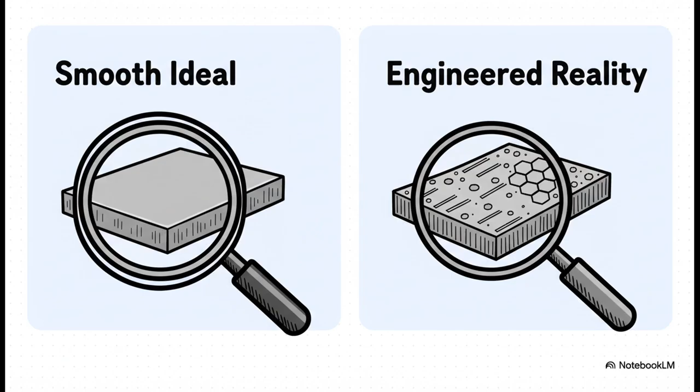So on the left, that's what we think we want, a surface that's totally flat, no features at all. But on the right, that's the reality of modern tribology, which is the science of friction. It's a whole world of microscopic grooves and dimples and intricate patterns, and every single one is designed for a specific job. The big takeaway here is that we've stopped chasing smoothness and started designing complexity.

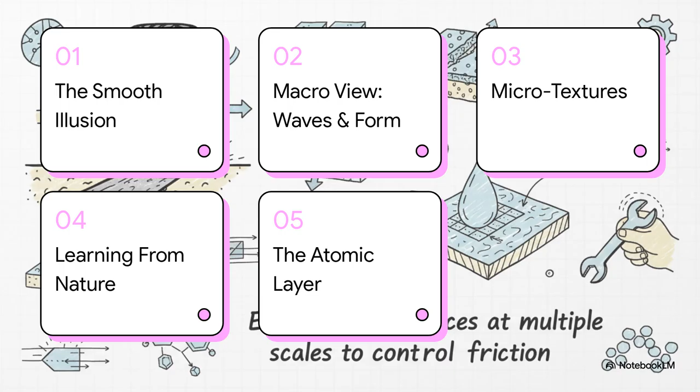So in this explainer, we're going to go on a journey from the world we can see all the way down to the atomic scale. We're going to shatter that smooth illusion, then look at the large-scale form of things, dive into those crazy microtextures, see how nature is inspiring these designs, and then we'll finish up with the atomic layers to give the ultimate protection. Okay, so let's start with that big idea.

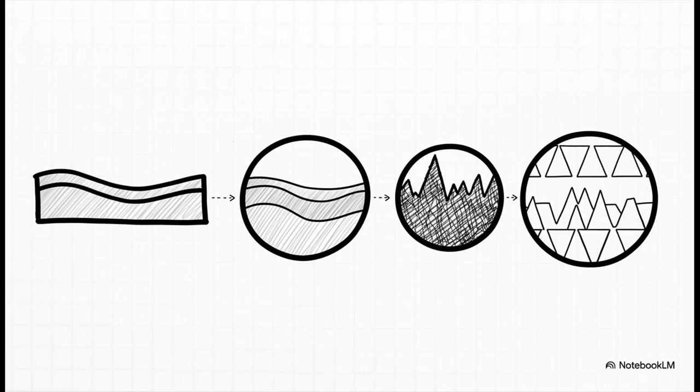For centuries, literally centuries, the main goal in any machine with moving parts, from a car engine to an artificial hip, was to reduce friction and wear. And for the longest time, the obvious answer seemed to be just make everything smoother. But here's the thing. It turns out friction is a multi-scale problem. A surface that feels perfectly smooth to your finger is actually, under a microscope, this chaotic landscape of peaks and valleys. The real game changer came when engineers realized the goal wasn't to somehow flatten this entire landscape, it was to control it, to actually engineer it.

When that happens, you get something called asperity contact. That's just a fancy way of saying the highest peaks on the two surfaces literally crash into each other and start grinding away. To stop that, engineers design features like micro bevels. These are tiny angled edges that basically force a wedge of oil between the surfaces. This is your first line of defense.

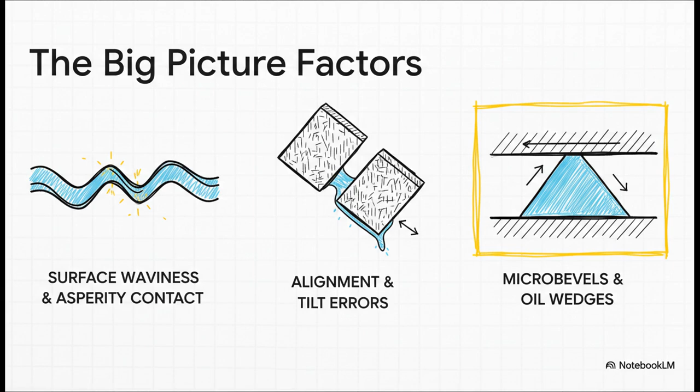All right. Now we zoom in again. This is where things get really clever. We're looking at textures so small you'd need a powerful microscope to even see them. Engineers are literally carving entire landscapes onto metal surfaces. And there are two main ways to do this. You can either create these tiny bumps that stick out, those are called protruded textures, or you can create these tiny little divots, which are called dimples. Both of them can seriously boost performance, but they work in totally different ways, so picking the right one is absolutely critical.

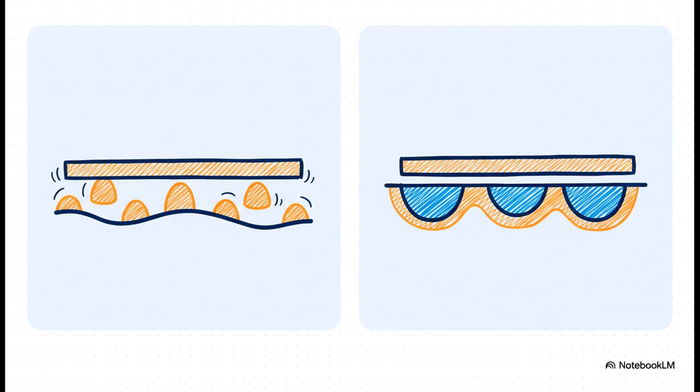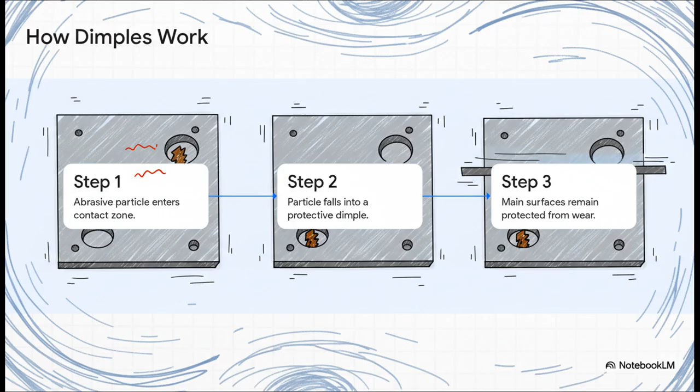Now check this out. This shows you one of the coolest functions of those dimples. So picture a tiny, nasty particle of metal or grit floating around in your engine oil. On a perfectly smooth surface, that particle gets dragged around, scratching and gouging everything. But with a dimpled surface, that little piece of grit can fall into one of these microscopic pockets. It gets trapped, safely out of the way, protecting the main surfaces from damage. It's like a tiny, brilliant little trap.

The level of detail here is incredible. It's not just about having grooves. It is all about the shape of those grooves.

An arc shape, for example, might be used to make a bearing stiffer. A rectangular groove, that's great for creating a seal. A V shape is fantastic for reducing wear. And a spiral can create a continuous film of oil. Every single shape has a specific job.

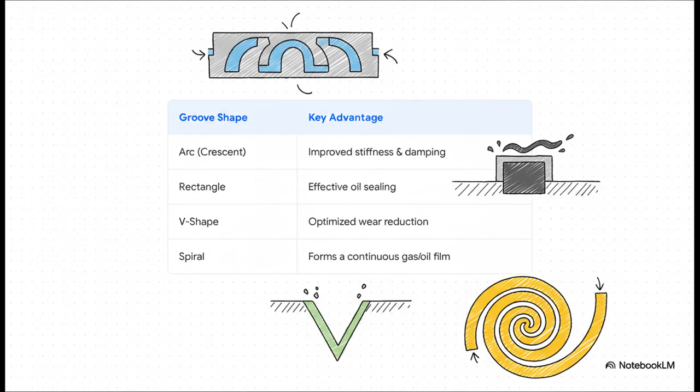And just to show you how ridiculously precise this science is, research has found that for those V-shaped grooves, the absolute best peak performance for reducing wear is achieved when the angle of that V is exactly 103 degrees. Not 100, not 105, 103. That's the level of mind-blowing detail we're talking about here.

So you have to wonder, where do engineers even get these ideas for such complex patterns? Well, a lot of the time, they look to the best engineer there is, nature. This field is called biomimicry, and it is completely revolutionizing surface design. Think about it. Nature has been solving friction and flow problems for millions of years.

So now, engineers are copying the diamond-shaped patterns from shark skin to improve lubrication. They're replicating the incredible grip of tree frog toes using hexagonal patterns. They're even creating surfaces that mimic a pitcher plant's slick, lubricant-infused walls.

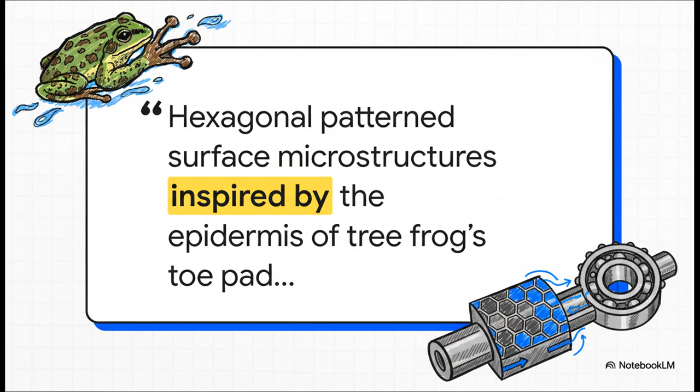It's just absolutely fascinating. Okay, we've gone from the big picture to the microscopic, but now it's time for our final stop, the deepest level yet, the atomic scale. This is where chemistry takes over, creating one last invisible shield against all that wear and tear. And that shield has a name.

It's called a tribofilm. The craziest part is, this isn't something you just apply like a coat of paint. It actually forms itself while the machine is running. The intense heat and pressure from the moving parts trigger a chemical reaction between the metal and the oil, creating a brand new, ultra-thin protective layer right where it's needed most. It's like a self-forming, self-healing armor.

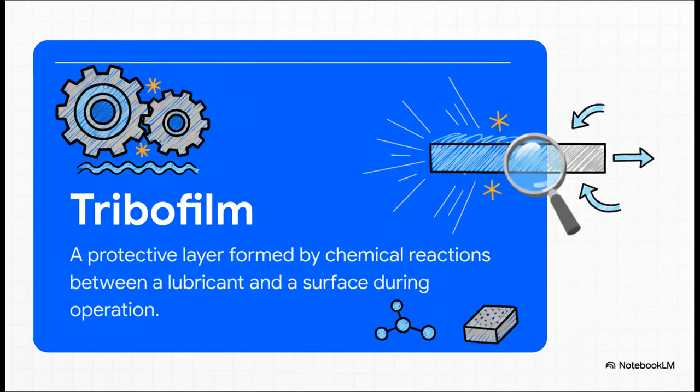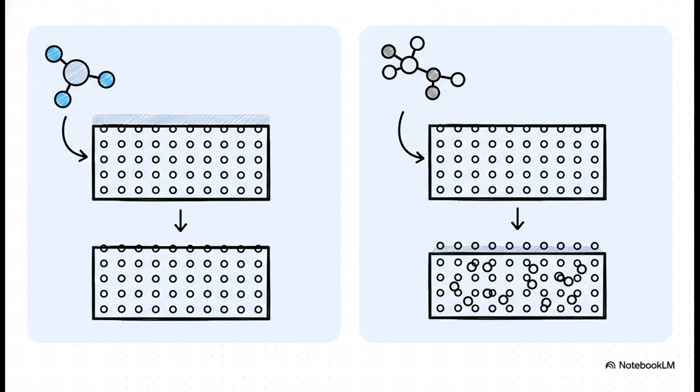And the chemistry of the oil you use, it's everything. Get this. Research shows that a simple methane-based lubricant can form a tribofilm that keeps the metal's original orderly crystal structure intact. But a more complex lubricant, like decane, actually messes it all up. It distorts the surface into a disorganized, jumbled, amorphous layer. It's like turning a neat stack of bricks into a random pile. So two different lubricants create two fundamentally different surfaces at the atomic level.

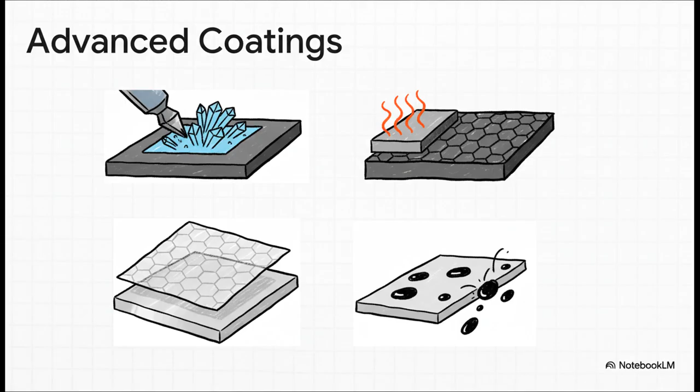The possibilities here are just exploding. We're talking about things like diamond-like carbon coatings, using heat to intentionally turn the top layer of a surface into super slippery graphite, or even applying single atom-thick layers of graphene. This is the absolute cutting edge of material science.

So, as we zoom back out, the big takeaway is this. The fight against friction and wear, it's not being fought on some simple, smooth battlefield. It's happening on a complex, multi-layered, brilliantly engineered landscape that stretches from the scale you can see and touch all the way down to the level of individual atoms.

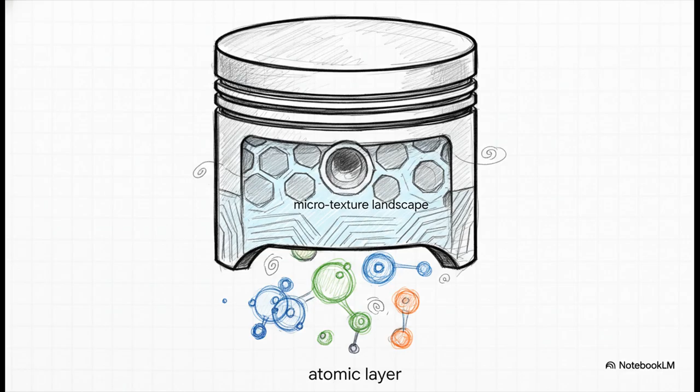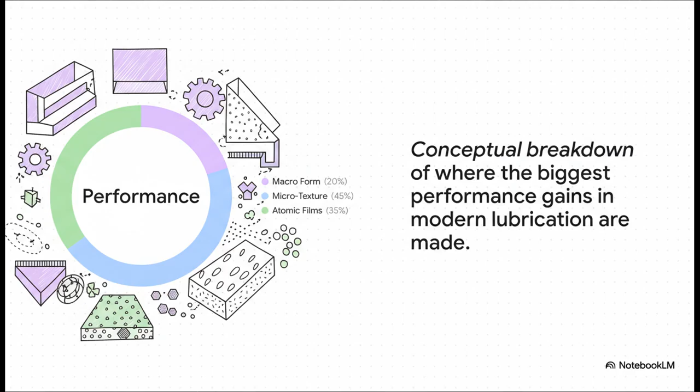And while every single layer matters, this gives you a pretty good idea of where the biggest improvements are coming from. Yeah, getting the basic shape right is the foundation. That's about 20% of the job. But the real magic, the vast majority of the performance gains, comes from those clever microtextures and those invisible self-forming atomic films. And that just leaves us with one final, mind-bending thought.

We've gone from simply polishing metal to designing its texture, its chemistry, and even its atomic structure. We're getting unbelievably close to controlling matter at its most fundamental level. So the question is no longer just, how do we reduce friction in an engine? The real question is, what entirely new problems will we solve? What new technologies will we create when we can build the perfect surface for any job, one atom at a time?